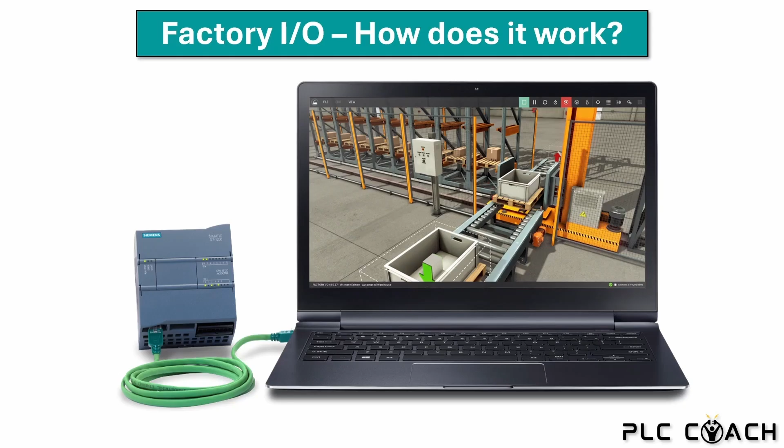How does FactoryIO work? Very simple. With this software you can create virtual machines using drag and drop. These machines have sensors and actuators that you can use in your PLC program. You can control the machines in FactoryIO using a real PLC, but you can also use PLCSIM. Using PLCSIM eliminates the cost for expensive hardware. That's why I will be showing you this option in today's video.

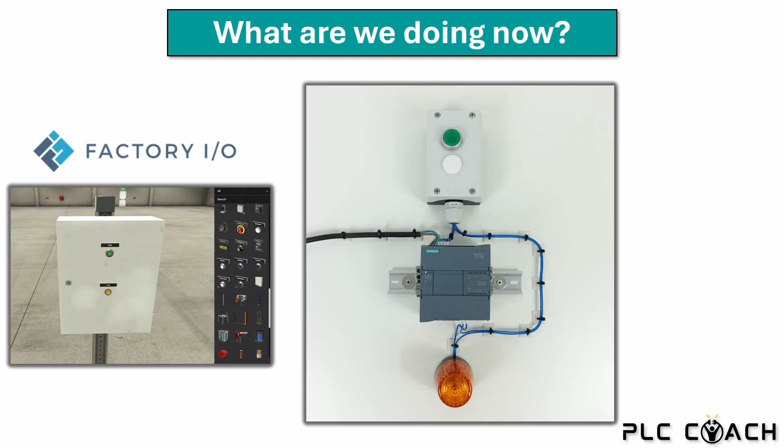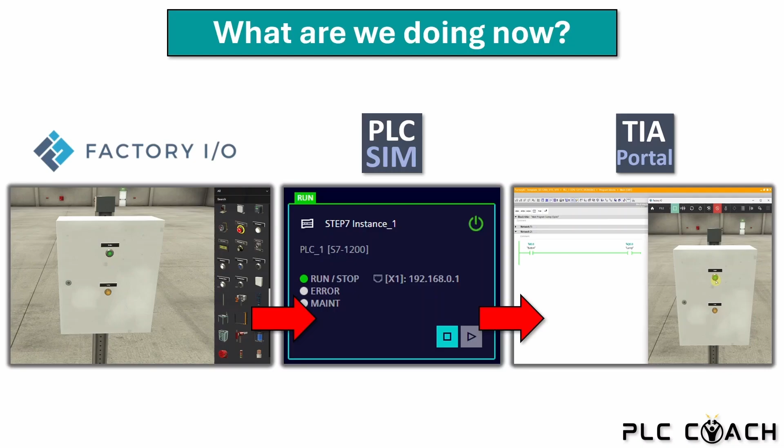Alright, what's next? It's simple. Here is our plan. First, we will build a small machine in FactoryIO that works just like our training system from the previous videos. Next, we will connect FactoryIO with the simulated PLC from PLCSIM. In the final step, we will use our program to control the virtual system inside FactoryIO. We are transforming our computer into a fully functional PLC training system. Let's not waste any time, let's get started.

If you have downloaded and installed FactoryIO, you will find this icon on your desktop. Everything I am about to show you now works even with the free trial version. First, let's create a new project. Here you see our empty factory floor. FactoryIO works just like the TIA Portal using drag and drop. On the right side, you will find all available objects. You can place them anywhere in your virtual factory.

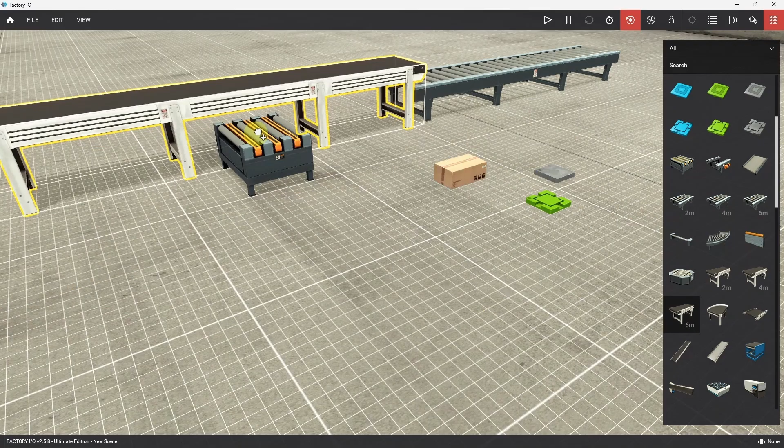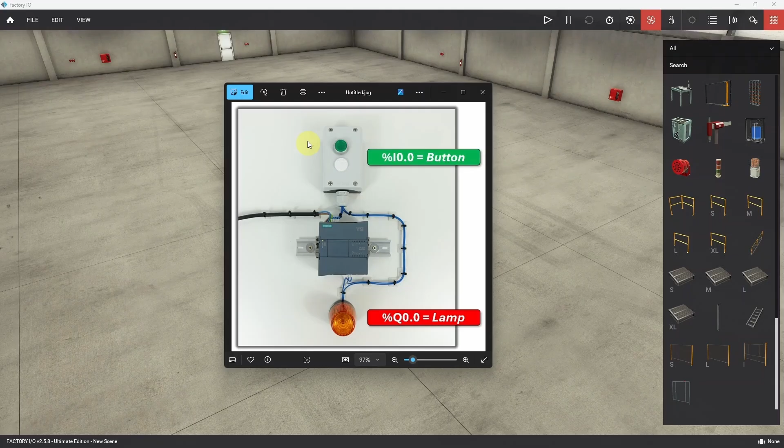Of course, in this first video, we will keep things as simple as possible. My goal is to recreate our training system. To do that, I will place a push button and an indicator light on a small control panel.

Clicking on this icon displays all sensors. Sensors send signals to the PLC like our push button. Clicking on this icon displays all actuators. This includes our lamp. Just like in the TIA portal, we should always label our sensors and actuators in FactoryIO. This makes the following steps much easier.

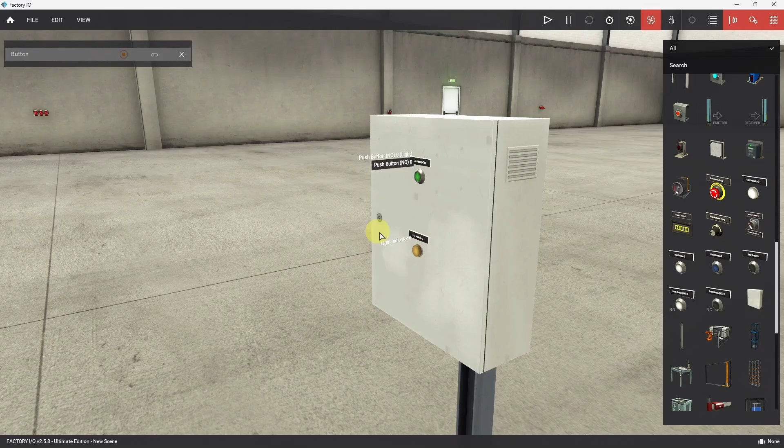Just like in our real training system, we have now added a push button and a lamp in FactoryIO. Next, we need to assign input and output addresses to the PLC. Click on the Drivers tab. The driver regulates how FactoryIO communicates with other devices. In our case, we will select PLCSIM, but as you can see, there are many other options as well.

The push button should appear as input I0.0 in the PLC. The lamp should be controlled by output Q0.0. That's all we need to do in FactoryIO. I am now on the official FactoryIO website. The developers provide a detailed online manual that explains the software in great detail.

We are here because we need a template to connect PLCSIM and FactoryIO. Click on Tutorials and Samples, Siemens, Setting up, PLCSIM. Depending on the TIA version you are using, download the right template. I am using an S7 1200 with TIA version 19, so I will download this file.

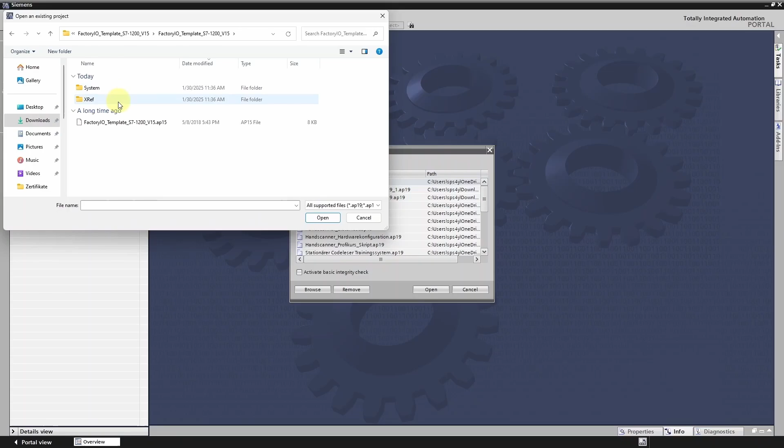I am now in the TIA portal. Once you have extracted the downloaded file, you can open it here. TIA portal is backward compatible. This means that you can open an older project, for example a project written in TIA version 15, in TIA version 19 by upgrading it. However, a version 19 project cannot be opened in an older version. Keep that in mind.

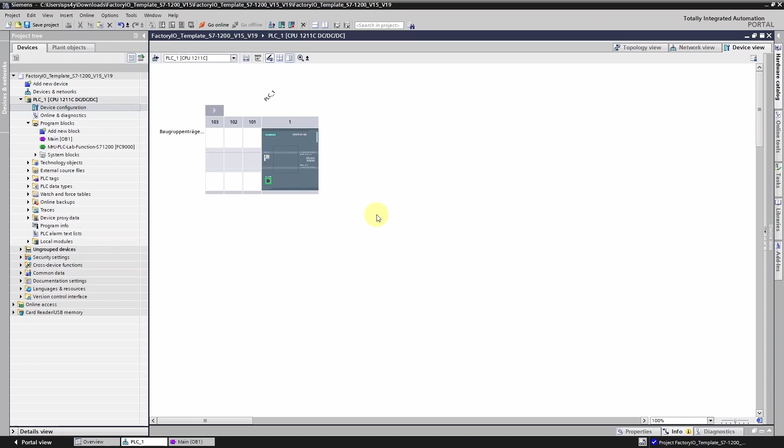After upgrading the project, you will see this screen. The entire hardware configuration has already been set up by the FactoryIO team. Just leave it as it is. Modifying it often leads to problems. Our task is to create PLC tags for our sensors and actuators. And that's exactly what I'm going to do now.

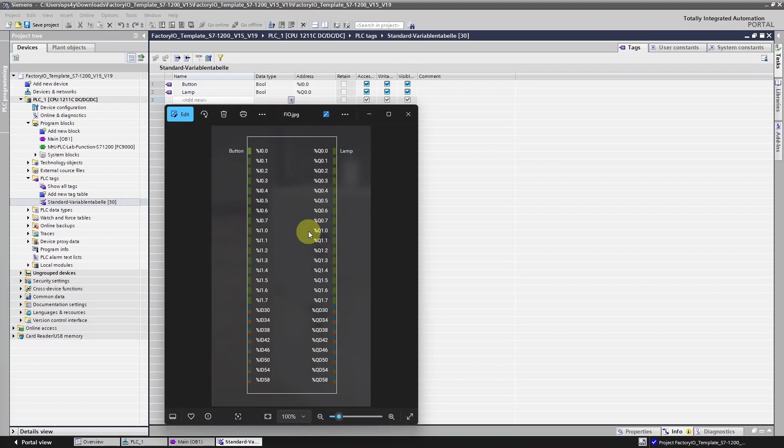I have now created PLC tags for the FactoryIO sensors and actuators. These tags can now be used in the program. In the template, there is already a block in OB1 which manages the data exchange between FactoryIO and PLCSIM. Just leave this block as it is. Now I will create a program for our training system.

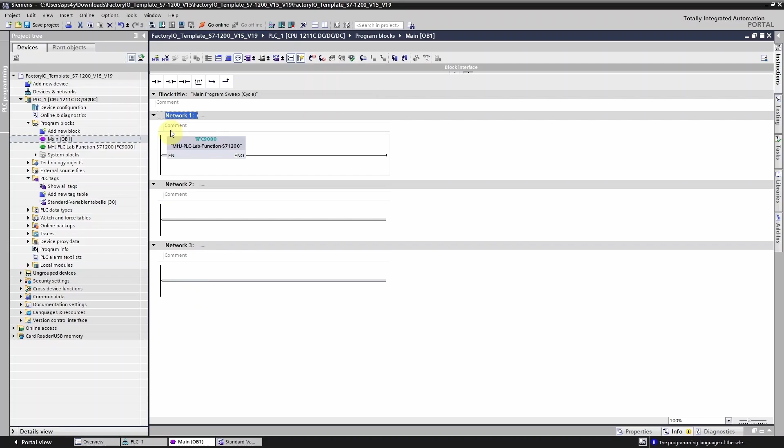We are almost done. Next I will start PLCSIM and transfer the project to the virtual PLC just as I showed you in the last video.

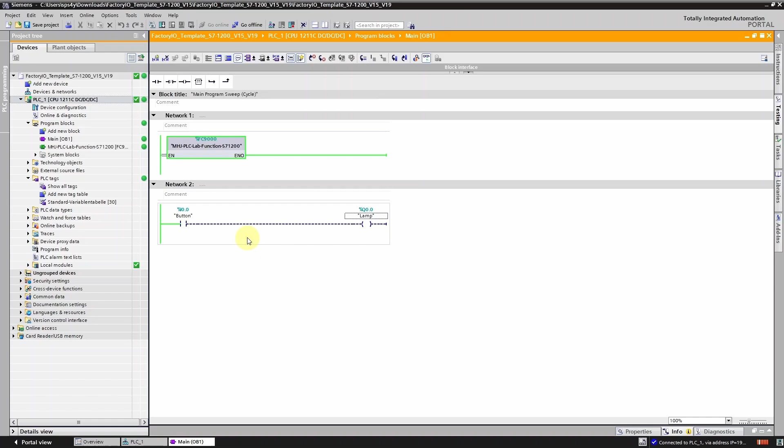I have now loaded the project into the virtual PLC in PLCSIM. The system is in run mode and I'm monitoring the program live. Now let's open FactoryIO again. All that's left to do is to establish a connection and set FactoryIO to run mode as well. I will now arrange the different windows properly and then we will check the result together.

Here you can see the virtual training system in FactoryIO. It is now connected to the simulated PLC in PLCSIM. When I press the push button, input I0.0 in the PLC becomes true and output Q0.0 is activated.

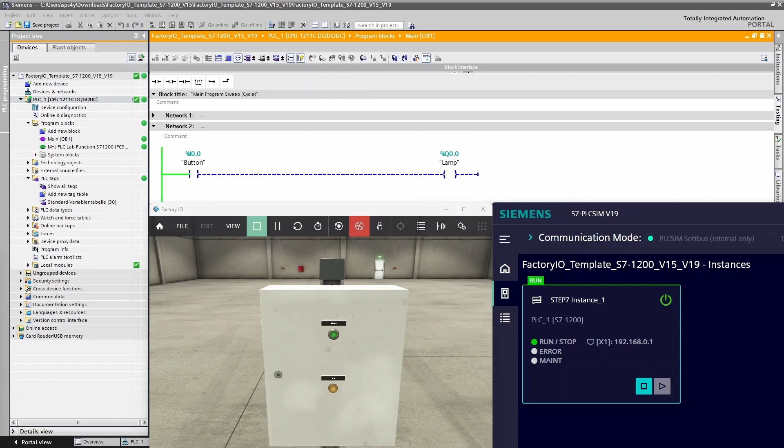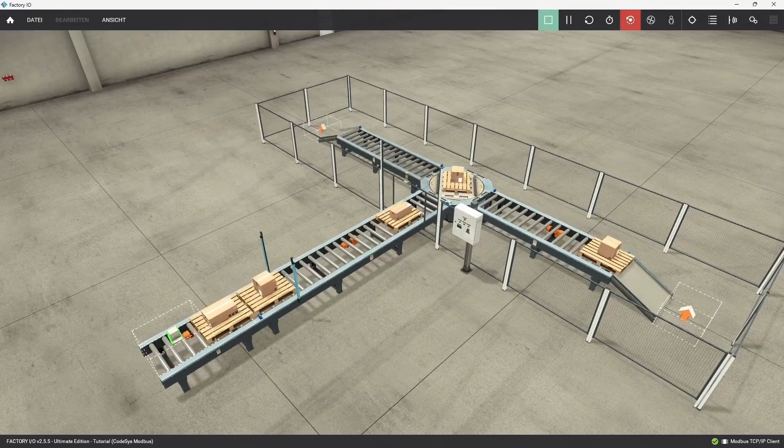Now be honest guys, this is super cool, isn't it? And you can use this training system for free for 30 days. With FactoryIO you can do so much more than just basic simulations. You can program small and medium-sized systems all the way up to huge virtual factories. No matter what skill level you are as a PLC programmer, this software will help you to take it to the next level.